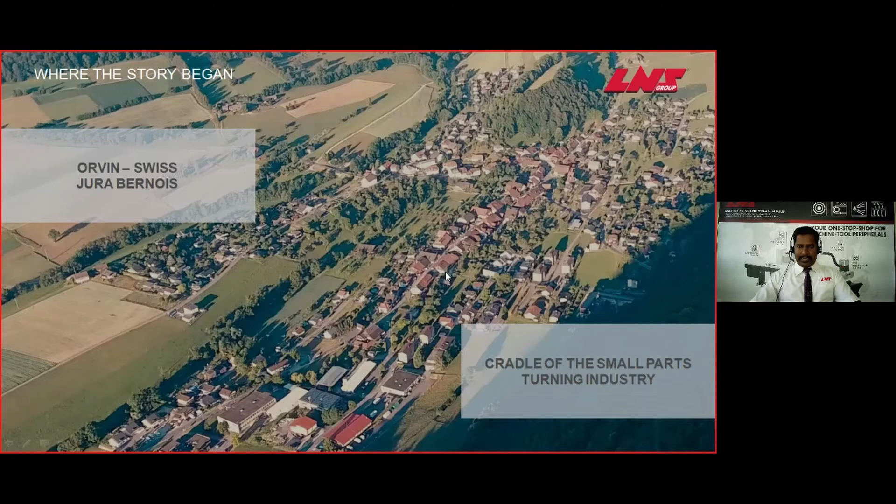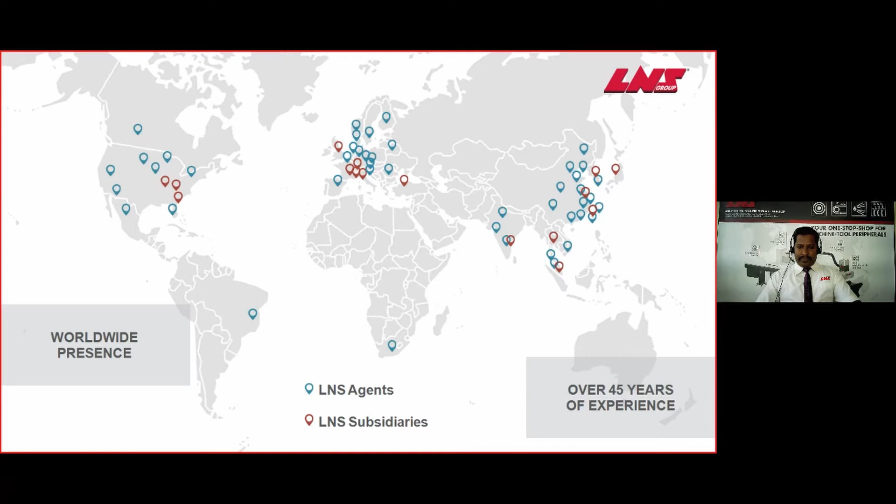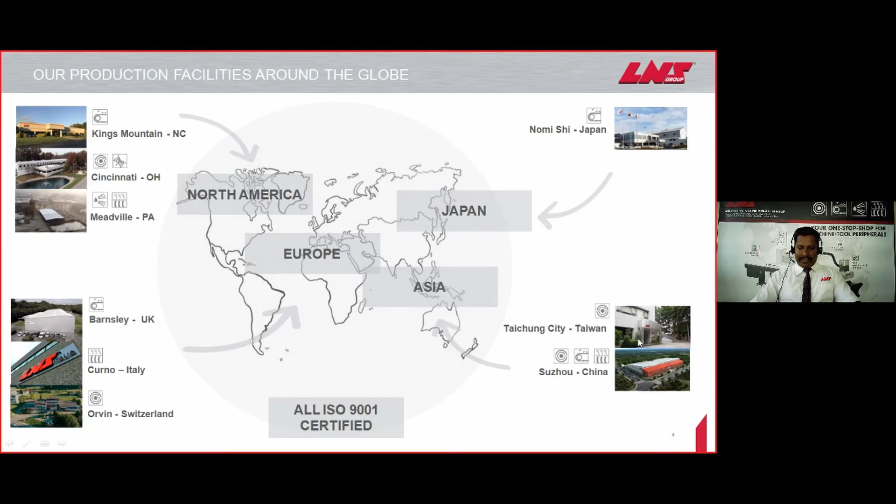LNS started in 1973 in Switzerland, Orvin, the cradle of small part turning and watchmaking industry in Switzerland. Over 45 years of experience, LNS has worldwide manufacturing facilities and sales and service teams to support our customers globally. Total, we have 9 manufacturing facilities around the globe: 3 in North America, 3 in Europe, 2 in Asia, and 1 in Japan.

Today in India, we have a total of 4 sales and service personnel. This is Tamizh from Chennai, I am taking care of South India sales and service. Mr. Balu is taking care of Northern region sales and service, Mr. Selju is taking care of Western region sales and service, and Mr. Shaji is taking care of all India basis customer support as well as new project and new business development through customer OEMs.

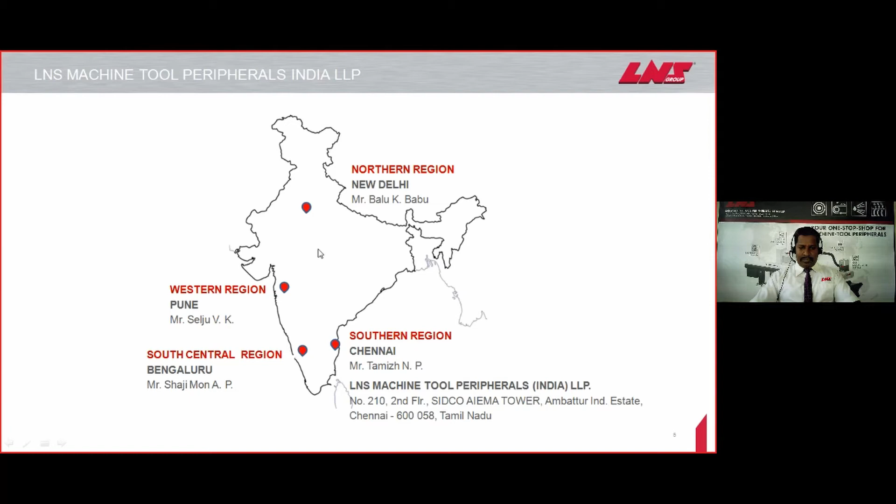LNS is the one-stop shop solution for machine tool peripherals like bar feeding systems, coolant management systems, air filtration systems, and chip conveyor management systems. For coolant management, we have high pressure coolant systems and coolant filtering, and for chip conveyors we have 250 micron, 500 micron filtering type chip conveyors. Our vision is that by 2022, LNS will be the global leader providing one-stop shop solutions for machine tool peripherals. To achieve this, we are committed to providing best-in-class products and service to our customers.

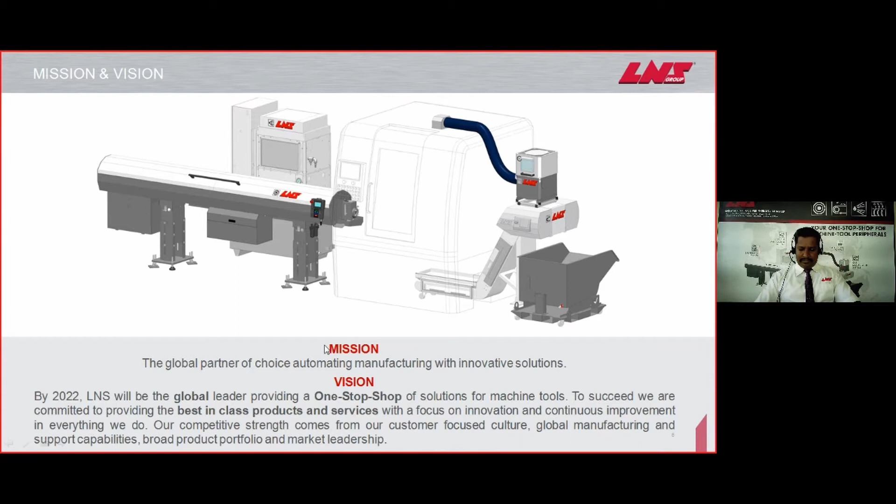Coolant management system: we have 5 kinds of products like HPC coolant systems, high pressure coolant, coolant chillers, cyclone filtration systems, tramp oil removing systems, and oil skimmers. LNS is actually the #1 supplier in the US market for high pressure coolant solutions.

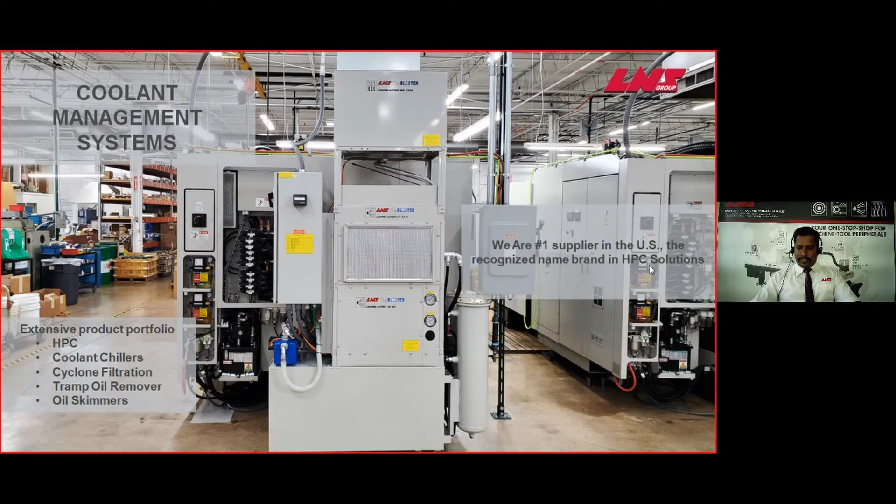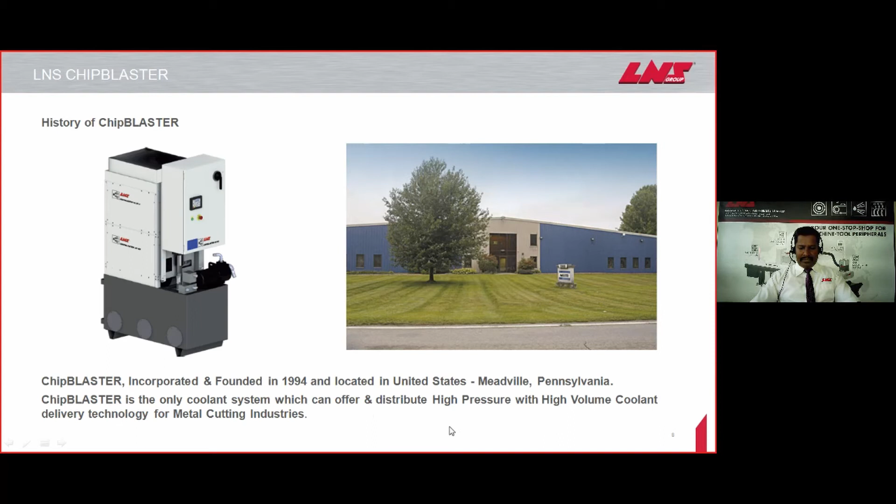Chip Blaster history: Chip Blaster was incorporated and founded in 1994, located in Meadville, Pennsylvania, United States. Chip Blaster is the only system which can offer high pressure with high volume coolant delivery at the metal cutting process. LNS acquired Chip Blaster in September 2018.

High pressure, high volume technology. What is high pressure, high volume technology? Let's see in the upcoming slides. LNS ChipBLASTER versus competitors: what LNS is doing and what competitors are doing.

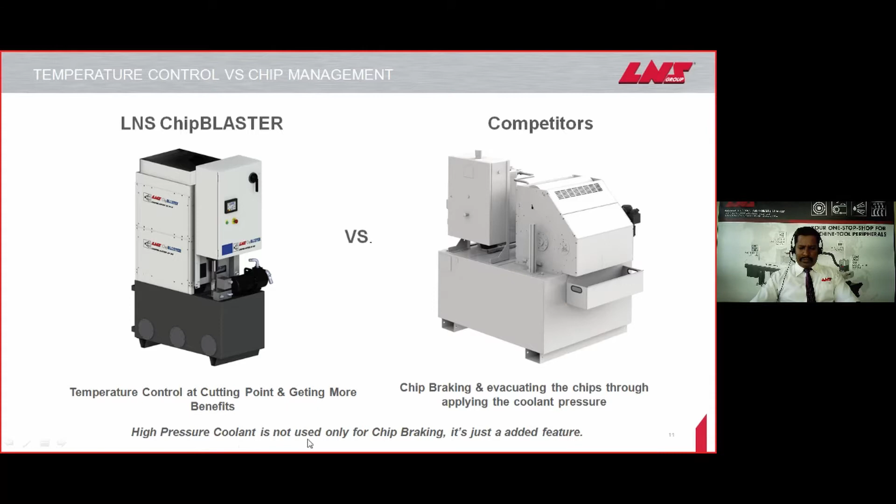LNS does temperature control at the cutting point and gets more benefits from it. Competitors focus on chip breaking and evacuating the chips by applying pressurized coolant at the cutting point. High pressure coolant is not used only for chip breaking, that's just an added feature.

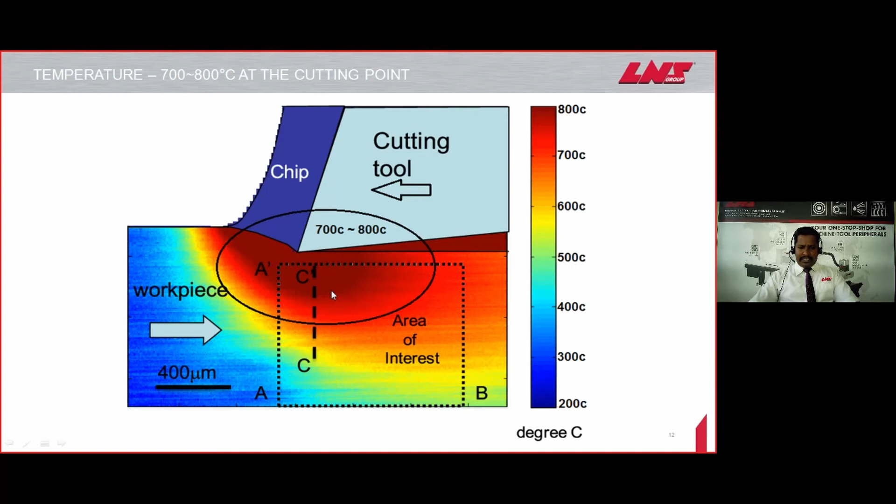The curly chip rolls on the component and the cutting tool similar to this. We apply normal coolant to the cutting point, but the coolant does not reach the actual cutting point, it does not penetrate to the cutting point to cool it down. Because of this issue, we face so many kinds of issues.

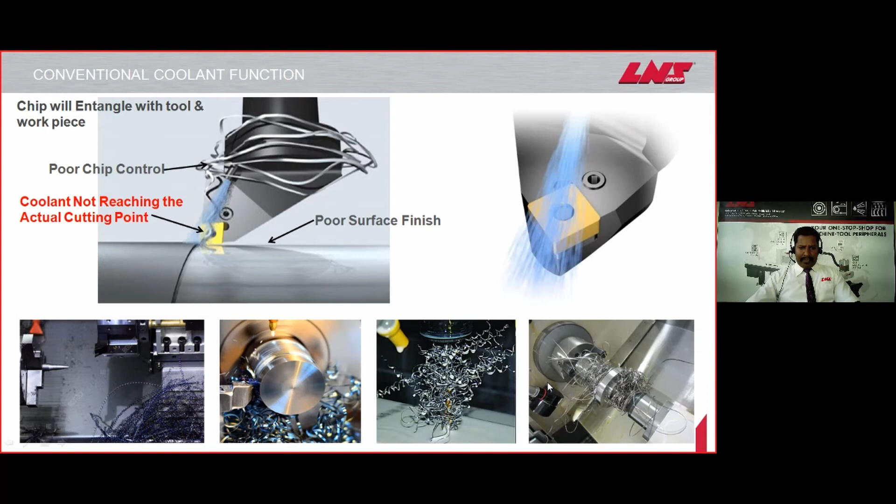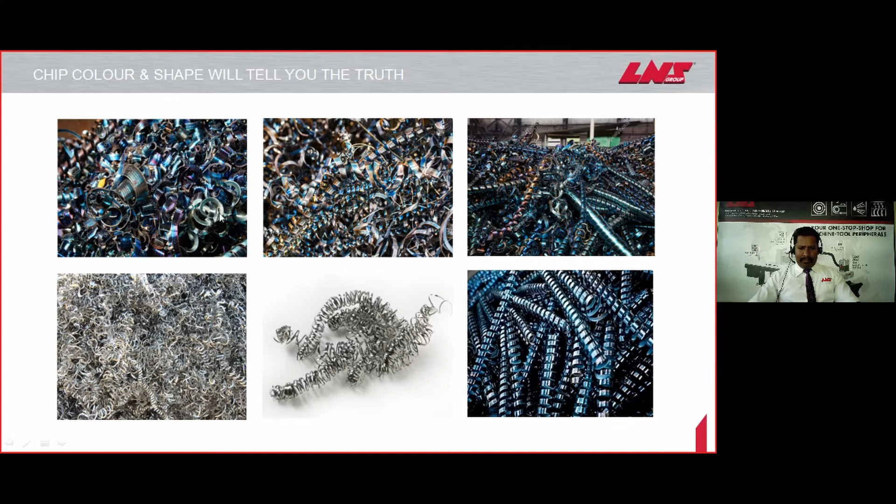If you can see the chip, it has transformed into blue color because of the heat, the enormous heat at the cutting point. The chip is getting a blue color.

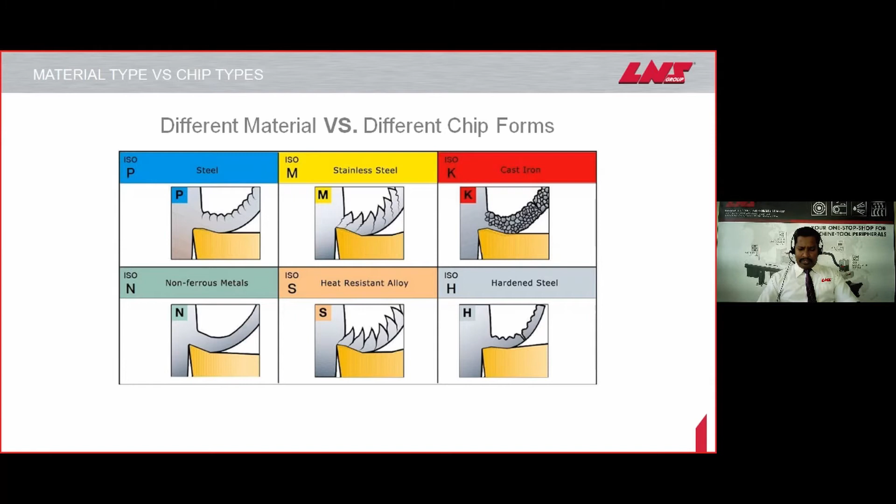So normal flood coolant, it is not reaching to the actual cutting point. Because of this issue, we are facing so many kinds of problems at the metal cutting process, such as superheated cutting tools and steam at the cutting point.

Steam means that due to more than 100 degrees Celsius, the coolant will automatically get steam and evaporate. This leads to higher cycle time due to lesser cutting speed, and lesser tool life because coolant cannot penetrate to the tool tip. There is no lubrication at the cutting point, poor chip control, and rolling of cutting tools with the workpiece. Chips fall back into the cutting point and get recut, similar to this.

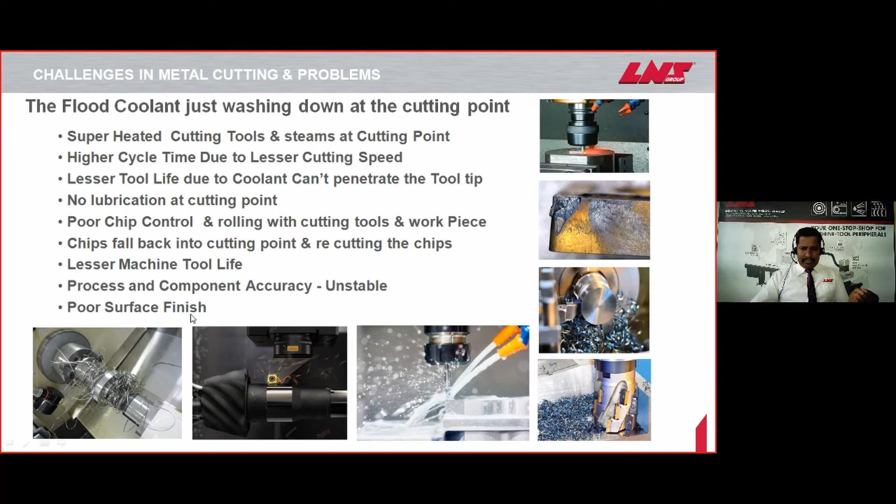And lesser machine tool life. This happens because during the metal cutting process, once the cutting tool gets wear and failure, it gives continuous load to the spindle as well as the guideways and everything. So the machine tool life also gets reduced, and process and component accuracy become unstable, leading to poor surface finish. This is the kind of issue we are facing in the metal cutting process.

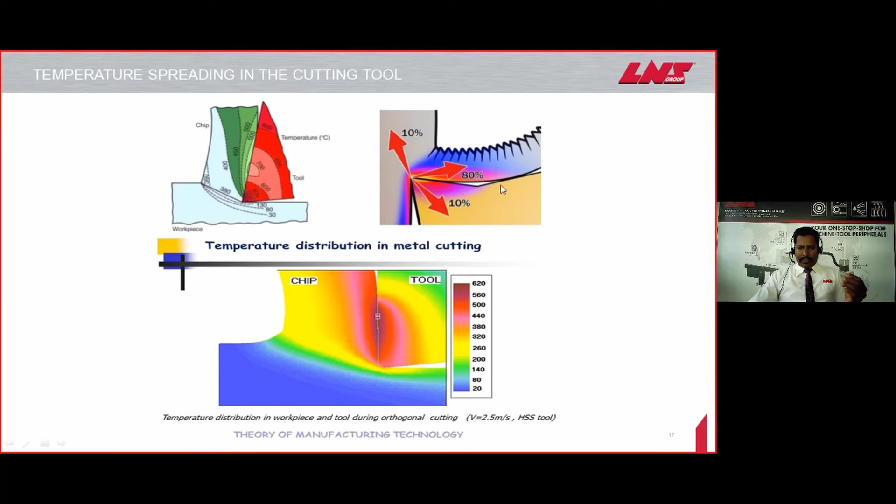Okay, here's how heat is generating at the cutting point and how it is distributing. For example, this is the cutting area: 10% of the heat is transferred to the component, 10% of the heat is transferred to the cutting tool, and 80% of the heat is transferred to the chip. So we need to focus on this place, we need to cool down this place. This is the actual graph of how heat is generated and transformed into the cutting tool, the chip, and the component.

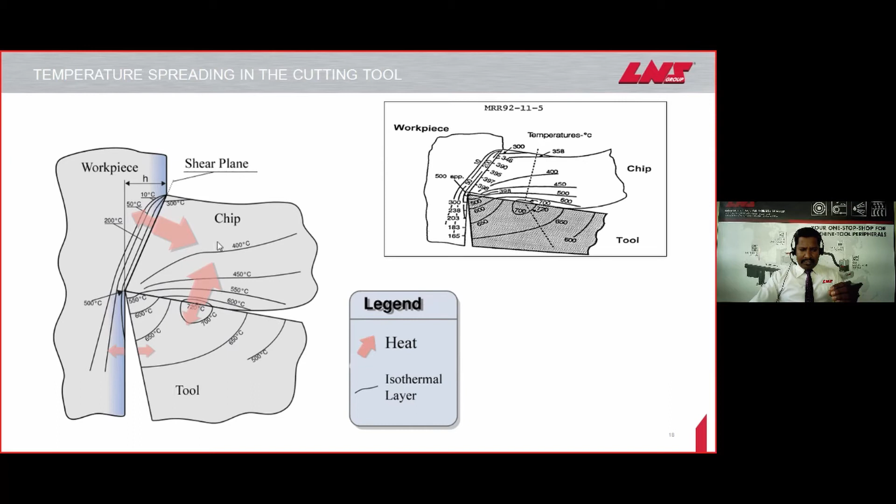So we need to focus on this place. We need to target this place to cool it down. How to cool down this place? We will see. Okay, here this is the cutting area.

So here is a vapor barrier. During the metal cutting process, around 700-800 degrees Celsius heat is generated, and this also creates the vapor barrier. So normal flood coolant or normal pressure coolant is not reaching the actual cutting point because of the vapor barrier. If the heat is more than 100 degrees Celsius, the water or coolant will evaporate and become steam. So we need to break this vapor barrier and enter into the cutting point.

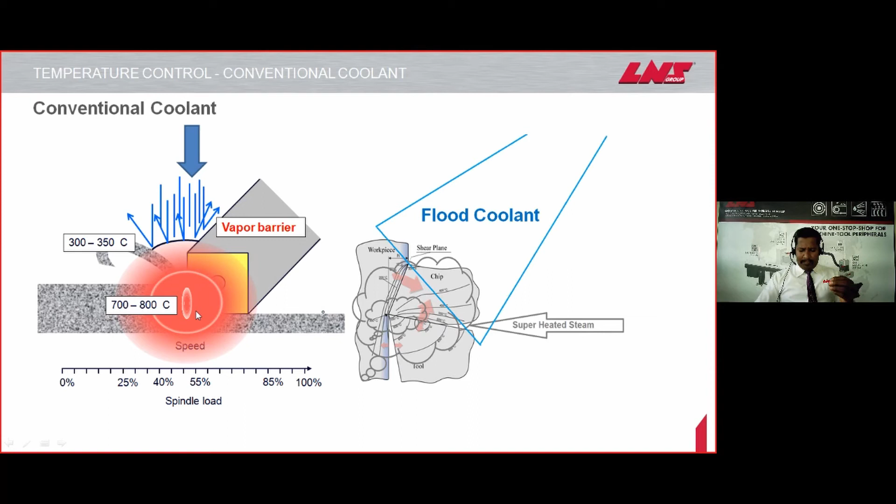Then only can we achieve our target temperature control at the cutting point. So how do we enter this place, the actual cutting point? Applying the coolant with force will eliminate the vapor barrier. That means we need to apply the coolant with full force. The force will eliminate the vapor barrier, break through it, and enter the actual cutting point, cooling down this place.

How much pressure do we need to apply? Let's see. From a simple thermodynamics formula, we have force equal to mass into velocity by gravity. Also, we have another small formula: 1 kilowatt equals 2 liters per minute. Based on both these calculations, we need a minimum of 70 bar pressure at the cutting point to break the vapor barrier and enter into the cutting point.

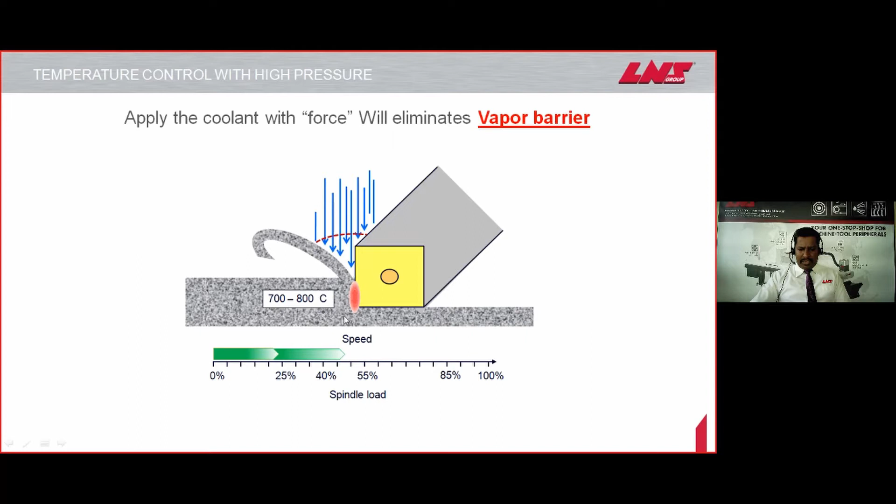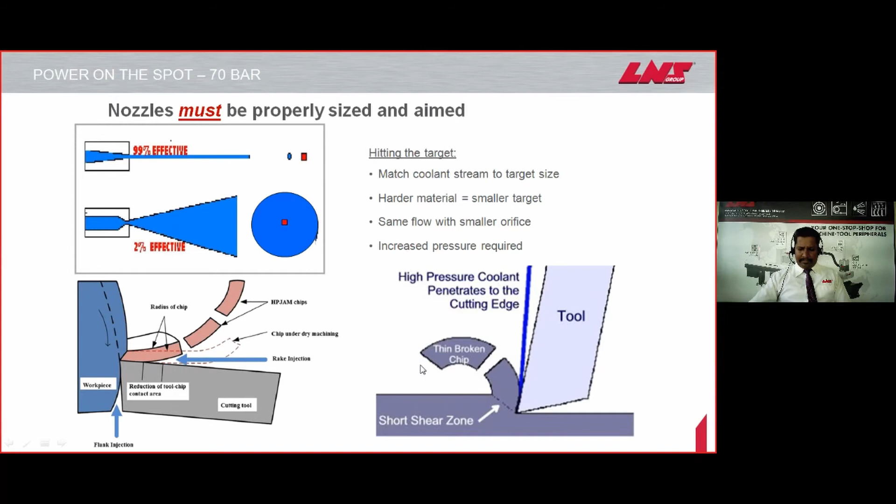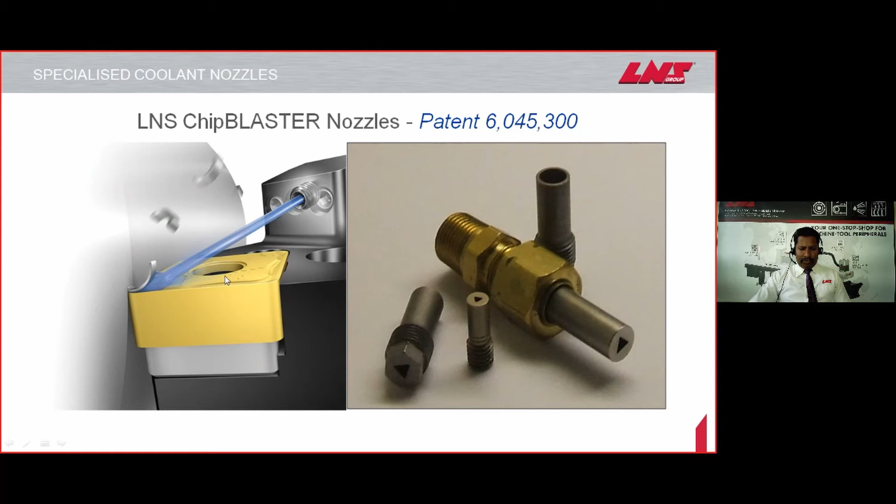Example, LNS having some special kind of nozzle for targeting the actual cutting point. This kind of nozzle will directly point to the targeted point, and the coolant hits the actual cutting point, automatically cooling this area, and the chip will automatically evacuate through high pressure.

Also, some cutting tool manufacturers have special kinds of tools like through coolant systems, for turning tools, grooving tools, small boring tools and drilling tools. Everything has a through coolant facility with their cutting tools. So we can use the same through coolant facility, connecting our high pressure coolant with fittings, to achieve the correct targeted point.

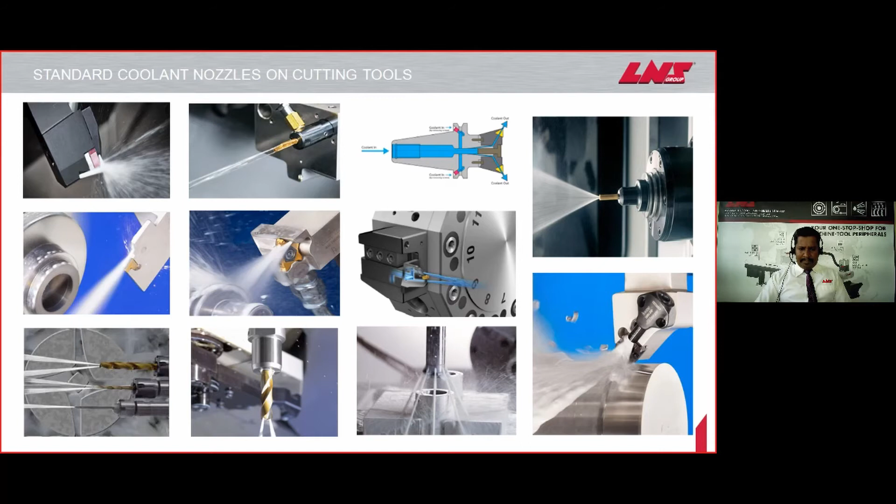Example, this is the normal cutting insert. This is normal flood coolant, it is not reaching the actual cutting point, and because of that the cutting insert still gets heat.

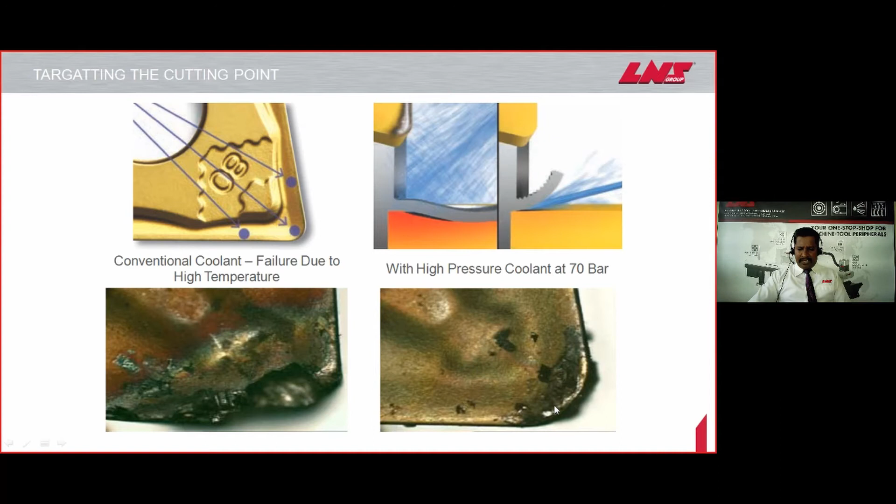So by hitting this targeted point, we can see how we can reach this place and what the advantages are. Properly directing 70 bar pressure coolant precisely at the cutting zone, we can hit directly at the cutting point.

Coolant penetrates the vapor barrier and eliminates the heat. Once we apply the coolant like this, it will automatically break the vapor barrier and enter into the actual cutting point, also creating a hydraulic wedge and resulting in a shorter shear zone.

So it will create the hydraulic wedge here and increase the shorter shear zone, so automatically the chip will get broken. Cooling down the cutting tool and material results in a broken chip, and no tool or part damage.

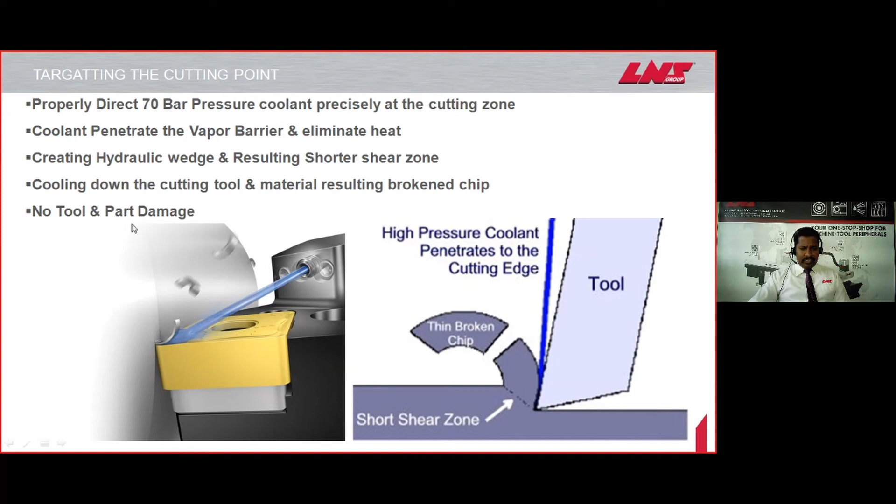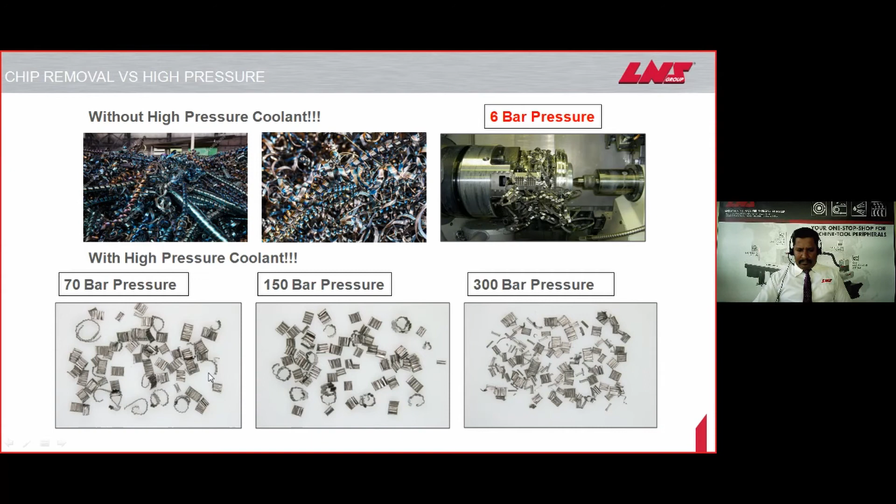High volume technology. What is high volume technology? Let's see. Configuring the HPC system, 70 bar pressure with many coolant outlets, like through coolant milling and drilling cutters.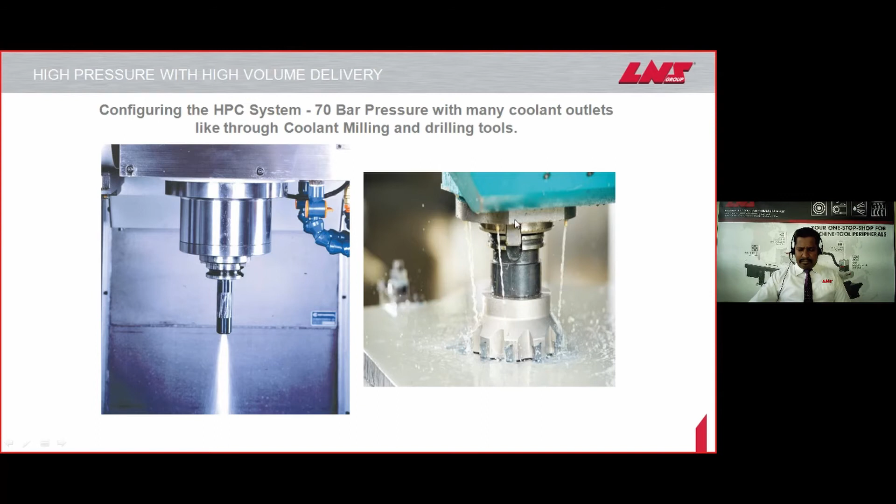Example, here we can see different kinds of cutting tools. All the cutting tools have a through coolant facility, and here it has 4 inserts and 4 holes. For example, all inserts have a through coolant facility and each hole delivers 70 bar pressure to the cutting point.

Here it is 70 bar pressure, maybe for example 30 liters per minute. Each hole will deliver 70 bar pressure and a total of 30 liters per minute coolant delivery.

Here, for example, it may have 8 inserts. So if we apply the same pressure and same volume of delivery here, it will give much less pressure, for example 35 bar pressure, and the coolant delivery will remain 30 liters per minute, but the pressure will be dropped. So what we need to do is increase the volume of delivery.

So here it was 30 liters per minute; here we need to increase the volume of delivery to 60 liters per minute. So here, for example, 8 holes will be there, each hole delivering 70 bar pressure, and at the same time, total of all 8 will deliver 60 liters per minute.

Here it was 30 liters per minute, so the pressure will not get dropped; only the volume of coolant will be increased.

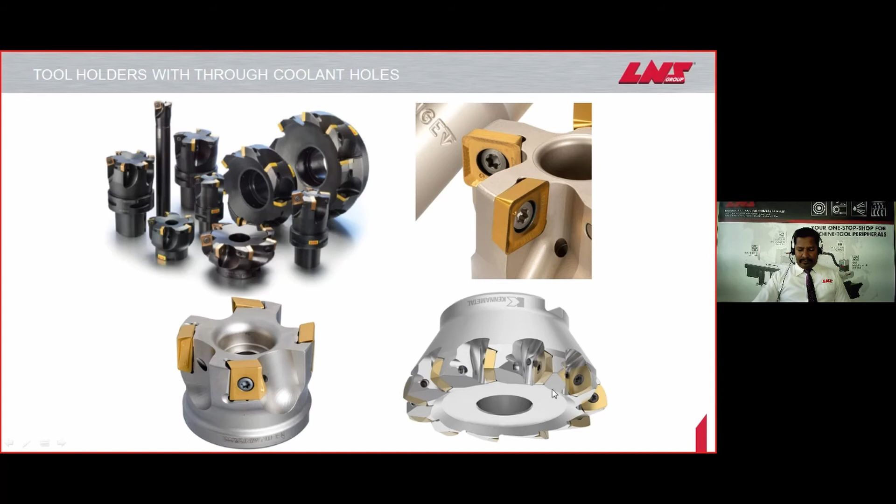So for this kind of high volume coolant delivery, LNS ChipBlaster is the only solution we can offer for high volume coolant delivery.

For example, this system can deliver 30 liters per minute, this system can deliver 30 liters per minute, and this system can deliver 30 liters per minute. So in total, the system will deliver 90 liters per minute.

Based on the application, some applications need 120 liters per minute delivery, some applications require 180 liters per minute delivery. So for all kinds of solutions, LNS ChipBlaster is the only solution to get high volume delivery at the same time as high pressure coolant at the cutting point.

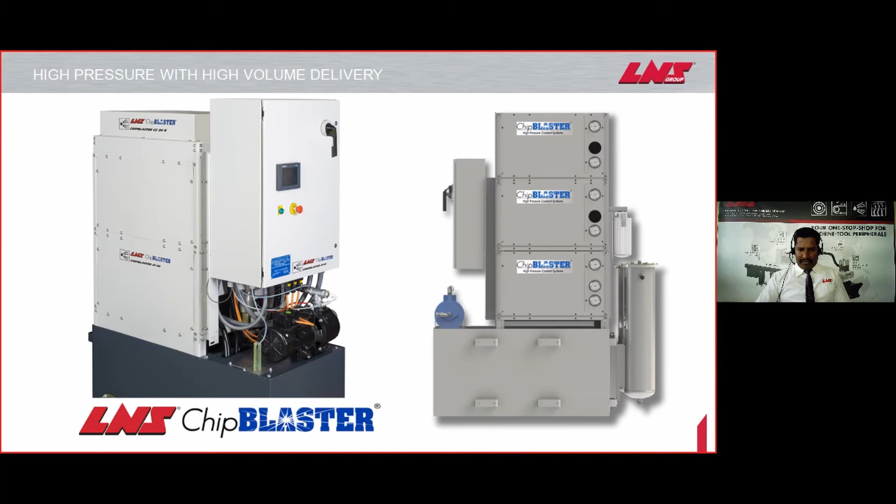Adding the high pressure coolant system in the metal cutting process, we get below advantages: longer tool life, minimum 30 to 50% we can achieve, and increased productivity achieved by increasing cutting speed by at least 30 to 40%, improving productivity.

Improved chip control - the chip automatically will break, giving improved chip control in the metal cutting process. Also improved surface finish and part accuracy - the component accuracy will be stable and the surface finish will be improved.

Eliminate heat related issues and failure of the cutting tools. During the metal cutting process, the heat automatically will drop and cool down due to the high pressure and high volume delivery at the cutting point.

Improved machine tool efficiency and life. For example, if the metal cutting process happens smoothly with no load, the spindle bearing and the guideways will also get smooth cutting load and it will give good long lasting life.

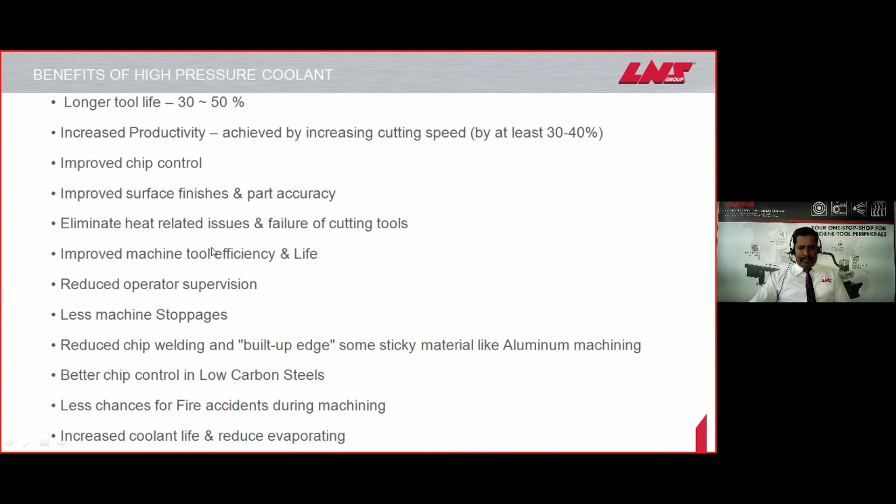Reduced operator supervision, less machine stoppages, and reduced chip welding and built-up edge on sticky materials like aluminum machining, and better chip control in low carbon steels, and less chance of fire accidents during machining, and increased coolant life with reduced evaporation. These are the advantages we get once we start using the high pressure coolant system in the metal cutting process.

LNS chip blaster uses three kinds of pumps - high pressure pumps to meet customer expectations and applications: long stroke pump and short stroke pump for the 3-piston pump, a smaller size 3-piston pump for CAT pump, and hydra cell pump for some cast iron machining like dirty coolants.

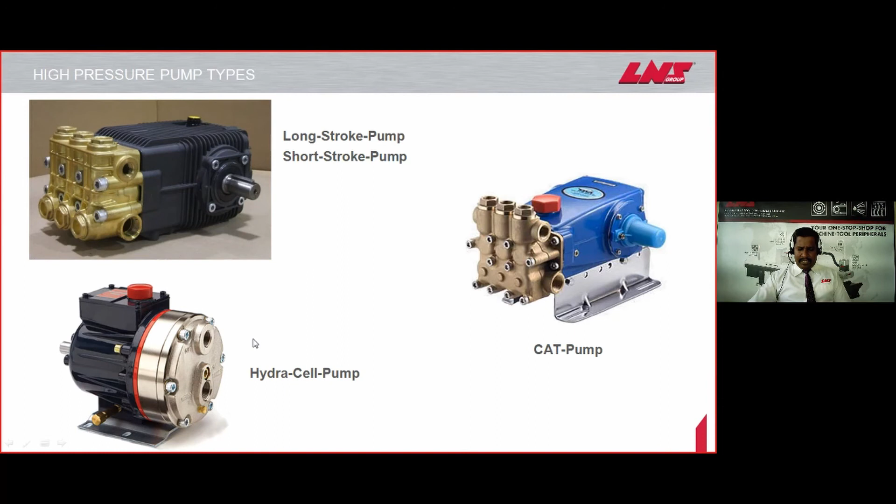This is the specialized seal manufactured by LNS chip blaster. We use this kind of seal in our machines. This seal is specially designed for our high pressure coolant pump and is manufactured by LNS chip blaster USA.

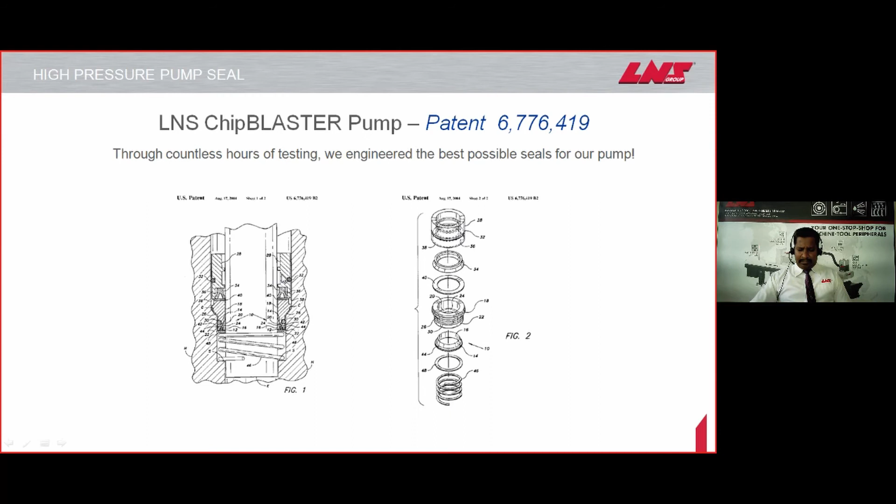This is a patented technology. It will give at least a minimum 5 years life for the LNS system pump. LNS chip blaster is the most advanced system in the market, with pressure between 20 bar to 345 bar and volume between 4 liter to 180 liter per minute.

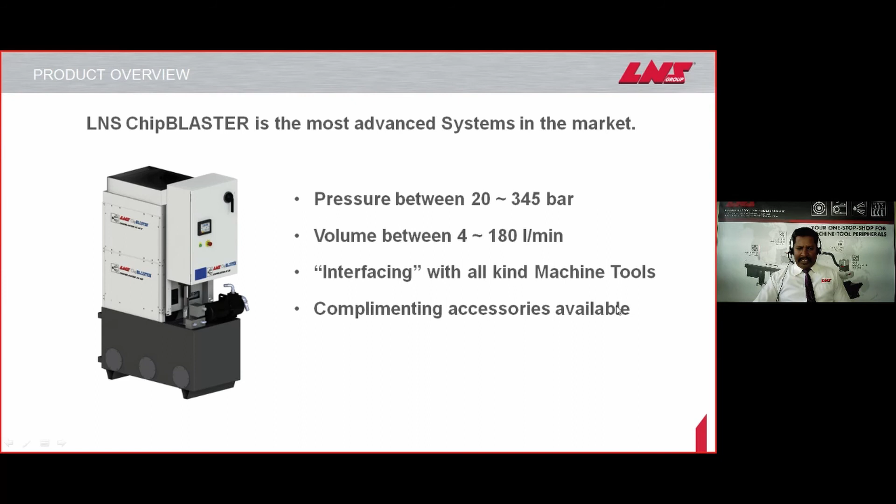It interfaces with all kinds of machine tools, with complementing accessories available based on the application. Here is the high pressure coolant system - we can configure the machine based on application and customer requirement.

For example: air filtration system, chip chiller, JV40 module, a bigger size coolant tank, cyclonic filtration system, and oil skimmer. Also we have a touch screen display for easy understanding and operating the system.

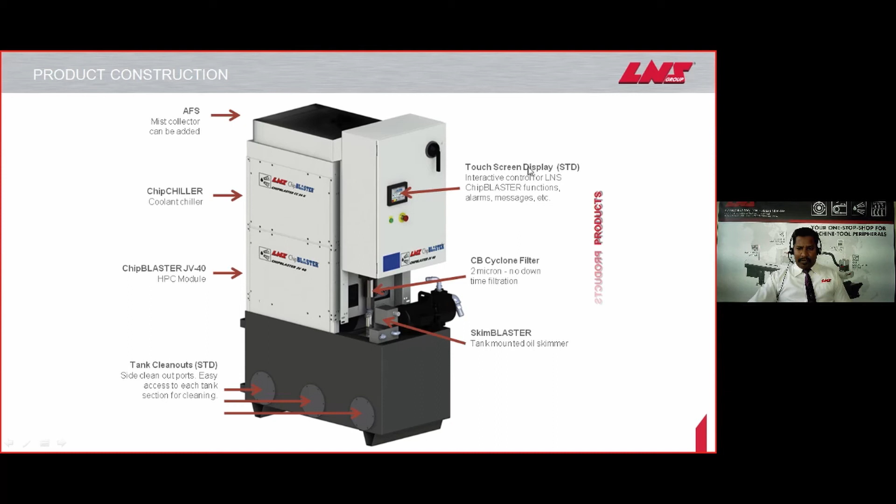LNS HPC is a modular system. We can configure it based on customer application, component, and machine tool. For example...

Here we have J30, JV40, and EV60 - three kinds of models with three kinds of volume of delivered coolant.

J30 will deliver 70 bar pressure and 30 liter per minute. JV40 will deliver 40 liter coolant and 100 bar pressure. EV60 will deliver 60 liter per minute and 200 bar pressure, as well as 100 bar pressure based on application.

Here we can configure, for example, the J30 model with a 380 liter coolant tank. It will deliver 30 liter coolant per minute at 70 bar pressure.

Here JV40, 3 units can be configured for 120 liter per minute at the same 100 bar or 70 bar pressure. And here EV60, we can configure 3 systems to achieve 180 liter per minute at 70 bar, 100 bar, and 200 bar pressure.

Based on that, we can configure per customer application. H30 and HV30 are both hydra cell pumps for cast iron machining - 30 liter per minute fixed volume and 30 liter per minute variable volume.

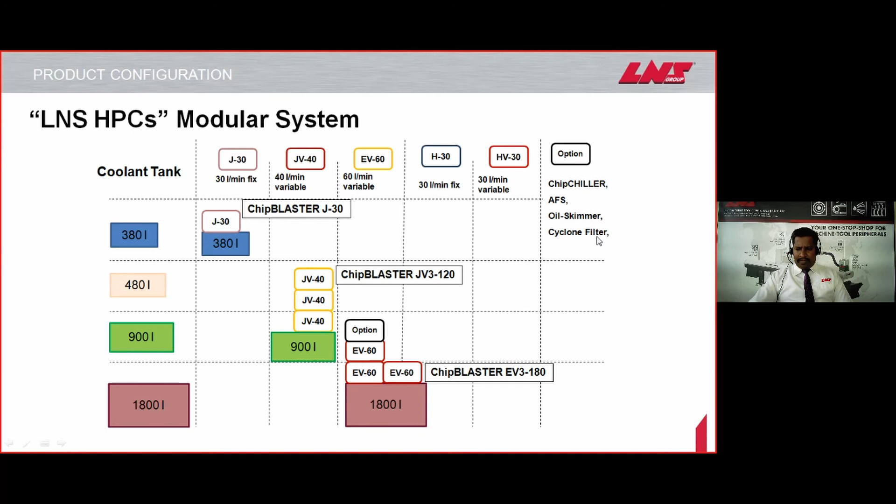We also have options like a chiller, air filtration system, oil skimmer, and cyclonic filter - a coolant filtration system.

Example: chip blaster J30, J60, J90 - all at 70 bar pressure and 30 liter per minute increments. It will deliver 30 liter per minute coolant.

It will deliver 60 liter per minute coolant, and it will deliver 90 liter per minute coolant. So here we can see one system delivers 30 liter per minute, and here two systems are combined.

Each system will deliver 30 liter per minute, so totally 60 liter per minute it will deliver. And here three systems are there, so totally it will deliver 90 liter per minute.

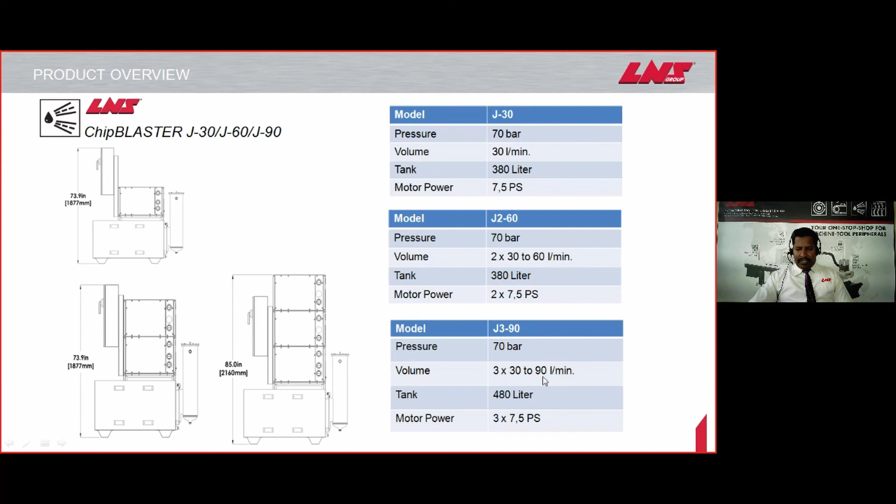JV40, JV80, JV120, all deliver 100 bar pressure and variable volume 11 liter to 40 liter. Same 100 bar pressure, 80 liter per minute, and same 11 liter to 40 liter per minute variable volume. Totally maximum 80 liter it will deliver, and here it will deliver 120 liter, same 100 bar pressure. So here we can configure three systems, here one, and one more we can add here, so total 120 liter per minute it will deliver.

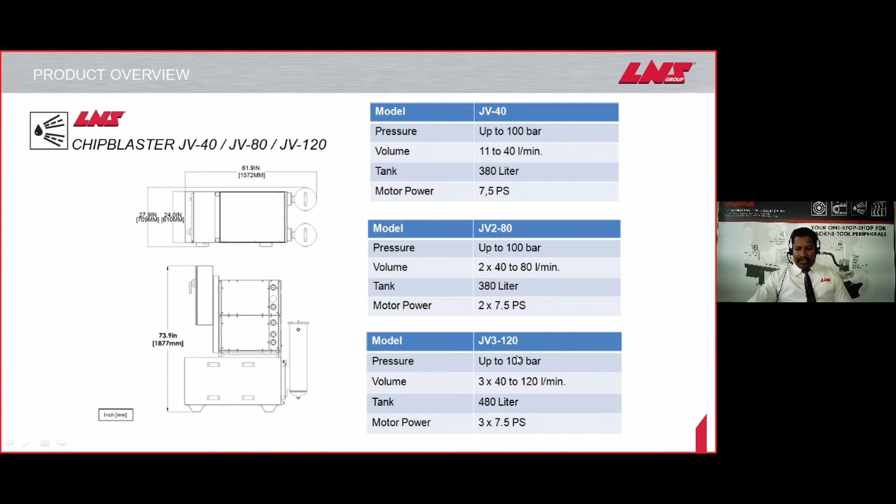JVHP40: here we can see 120 liter per minute, 40 liter per minute and 200 bar pressure. Maybe we can add three systems here, same 200 bar pressure, and it will deliver 120 liter per minute and 200 bar pressure. Here we can show only 200 bar. Maybe we can add three systems here, and it will deliver 200 bar pressure with 120 liter per minute coolant.

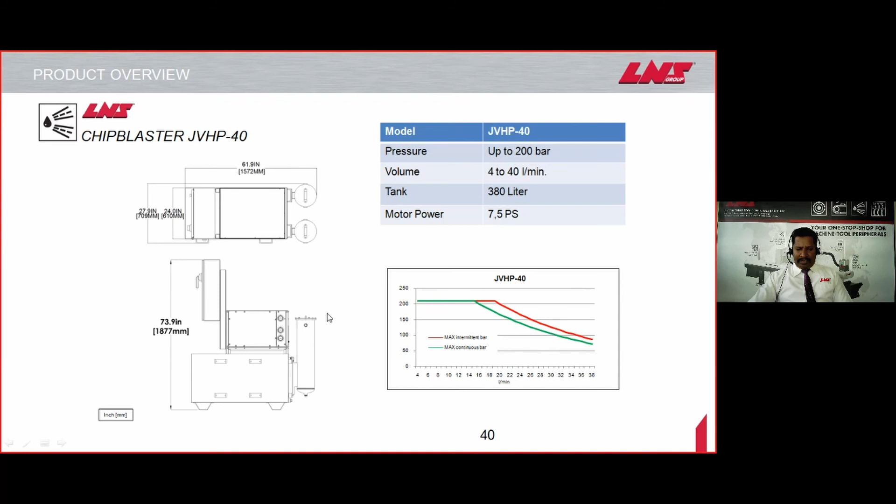So this is Hydra-Cell pump, for hydrocell pump fixed volume, hydrocell pump variable volume. Same 70 bar pressure for 30 liter per minute and variable volume 8 liter to 30 liter, same 70 bar pressure for the dirty coolant like cast iron machining.

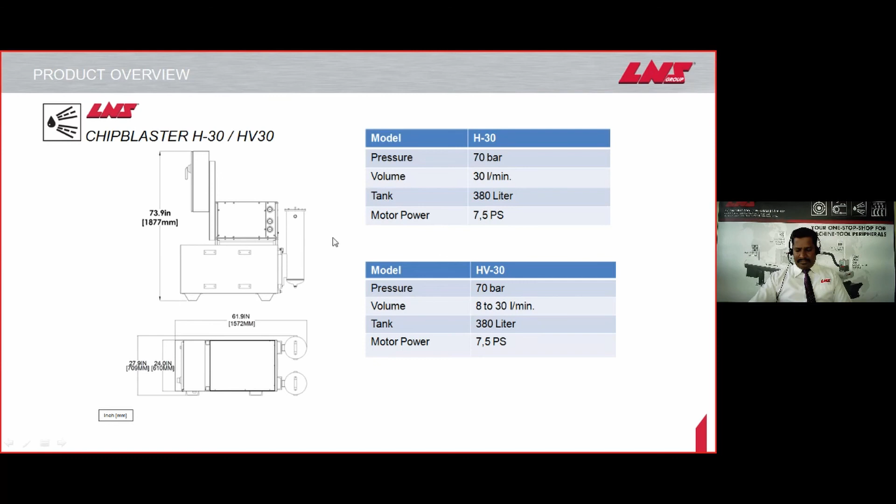Chip blaster M30 is the basic entry level model for smaller machine tools. It will deliver 70 bar pressure and 30 liter per minute coolant, smaller coolant tank, 190 liter coolant tank.

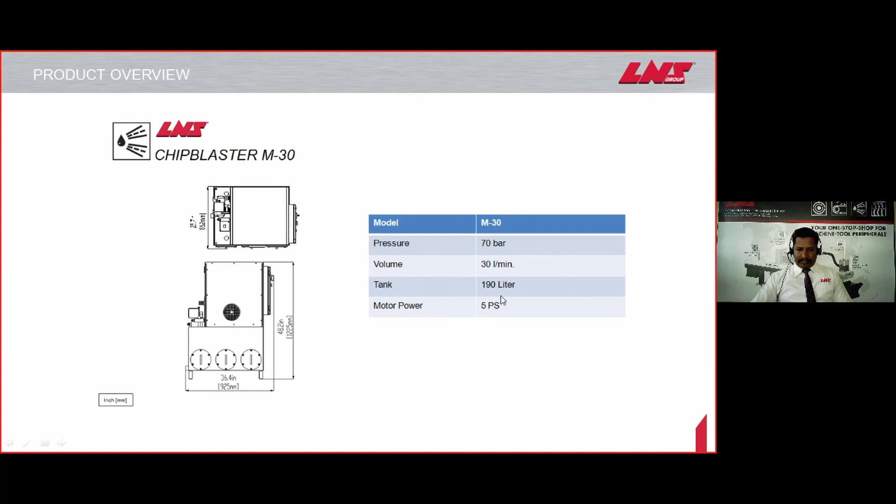Swiss blaster is suitable for all auto lathe machines. Here we have three kinds of models: 70 bar pressure, 100 bar pressure, 140 bar pressure. At the same time it will deliver 40 liter per minute and 30 liter per minute, and here 20 liter per minute. 140 bar we can get 20 liter per minute, 100 bar pressure we can get 30 liter per minute, and 70 bar we can get 40 liter per minute.

We have different kinds of models. Also we can increase the volume of delivery for each model.

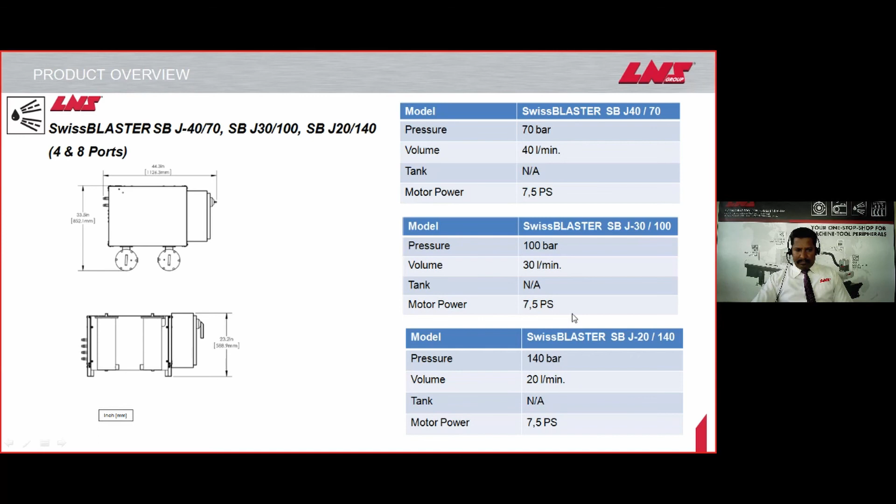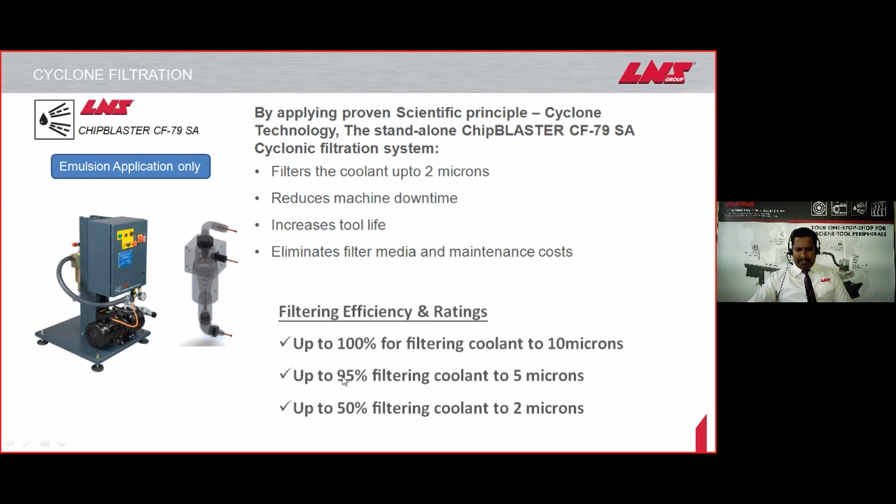So this is the cyclonic filtration system. The coolant will inlet like here, and the filtered coolant will go to the high pressure system. All the sludge and slurry will go to the sludge tank for further filtration. It will filter up to 2 micron 100%, 50%, and 10 micron it will filter up to 100%, and 5 micron it will filter up to 95%, 2 micron it will filter up to 50%.

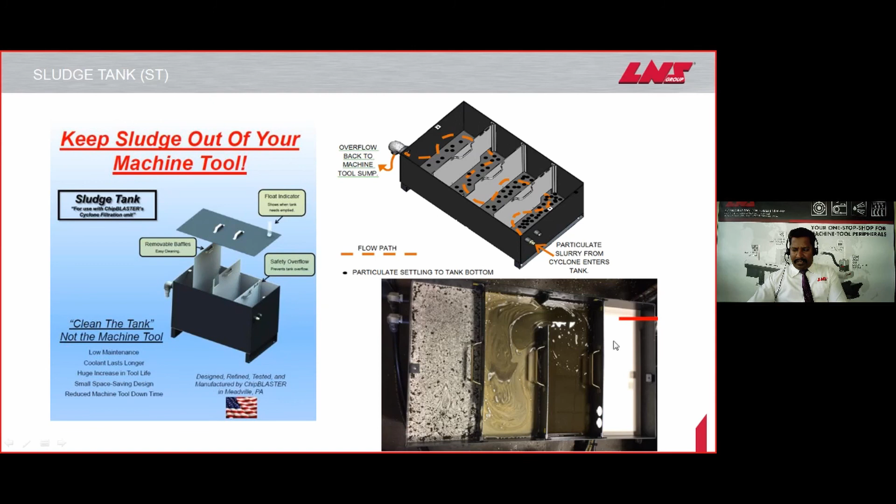The sludge tank: after the cyclonic filter, all the slurry will come here. The small particles will mix with coolant, it will flow like this, and go to the machine tool sump. The coolant here, all the slurry and oil, is mixed with this, and finally the coolant will be like this.

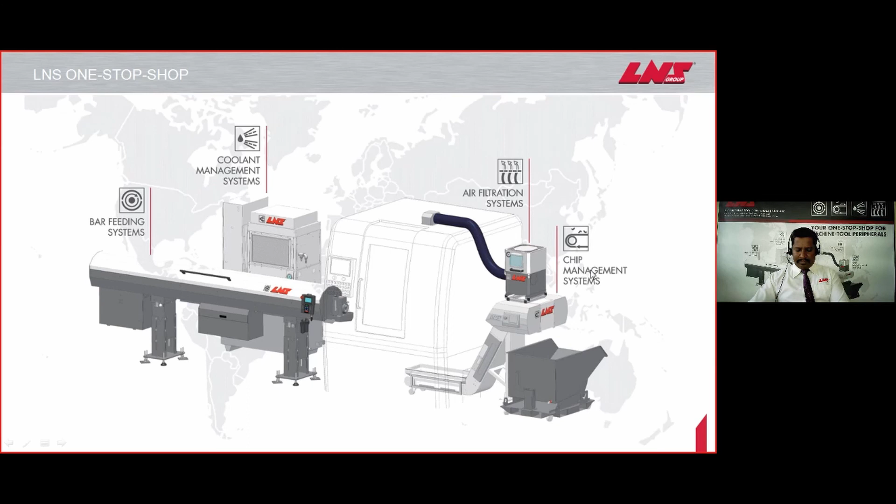LNS is the one-stop shop solution for all your machine tool peripherals like bar feeding systems, coolant management systems, air filtration systems, and chip management systems. We have solutions for all kinds of industries: electronics, aerospace, machine tool, medical and implants, energy and oil and gas, automobile, heavy engineering, and luxury and high precision industries. Your one-stop shop solution for machine tools like bar feeding, chip conveyor, coolant management, and air filtration systems.

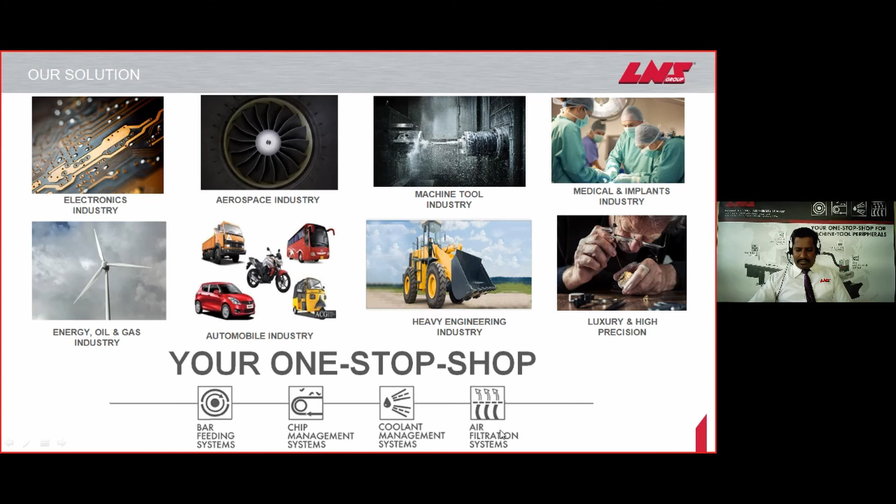Patrick, is there any questions or any comments? Thank you, Mr. Tamiz. This time there are no questions, but if anybody does have a question, I would encourage them to reach out to us directly and we would be happy to assist. Okay, thank you.